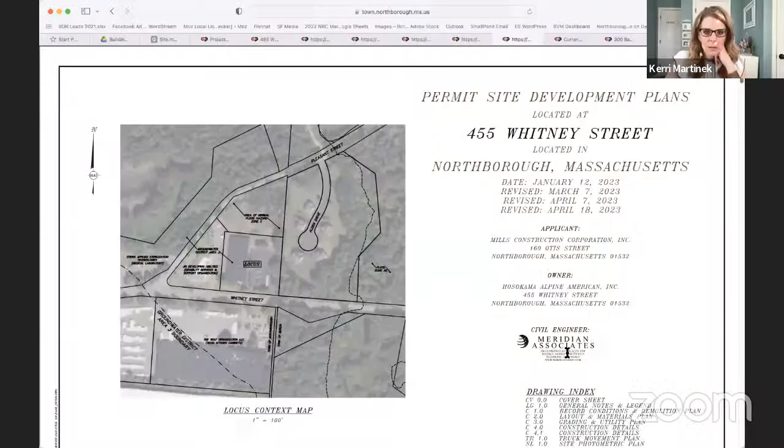Okay, do you see 455 Whitney Street here? Permit site? Yes, great. So can you go to the third sheet, which would be the existing conditions. There you go. Okay, so that shows the existing conditions, the existing limits of the pavement.

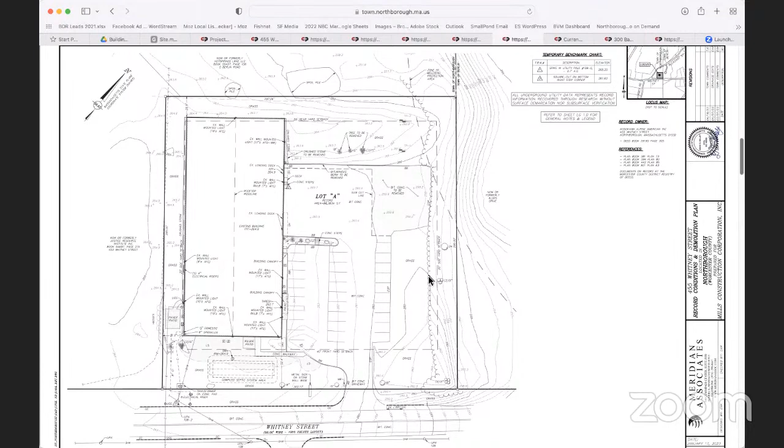The only thing to note here is where it says Lot A to the right, you'll see the proposed saw cut line in the area of pavement to be removed. If you go to the next sheet, I can show you what we're doing.

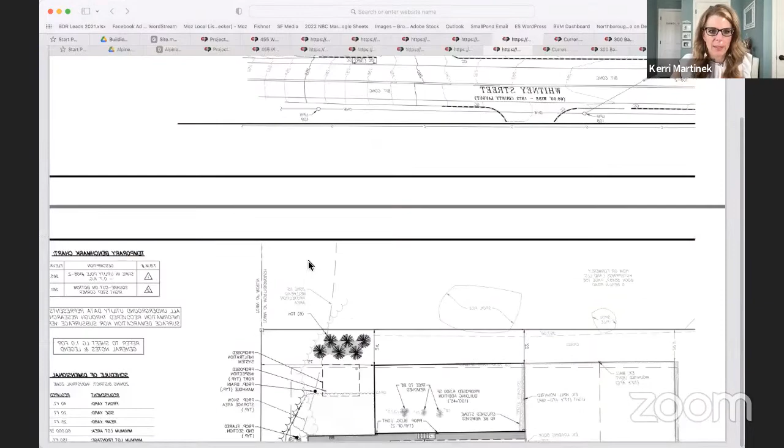Hold on, sorry, I got fancy trying to resize it and now I can't. Okay, there we go, that's good. So as you know, the applicant is proposing a 4,500 square foot building addition.

We're proposing some stormwater features, and we've worked with Mr. Litchfield on these. Next to the addition is the infiltration dry well system, which will handle the roof runoff.

Also, the area of pavement that's shaded is going to be replaced, but it's actually being scaled back a little bit. You'll see the right edge has been cleaned off and pulled back away from the property line. We've added a catch basin structure in the lower right corner with bituminous berm edging. Mr. Litchfield wanted to use this as an opportunity to improve the stormwater on site. So the area of pavement is partly being replaced because we had to tweak the grades to pitch everything into that corner.

To be collected into the catch basin unit - if you go to the next page, I can show you what's happening. As you see the proposed contours, it's going to go down into the catch basin unit, which would then dump slightly to the south into a grassed forebay, which will then cross over a weir - basically a weir with a piece of concrete curbing to create a stone weir elevation, then into a level spreader, a stone lined level spreader.

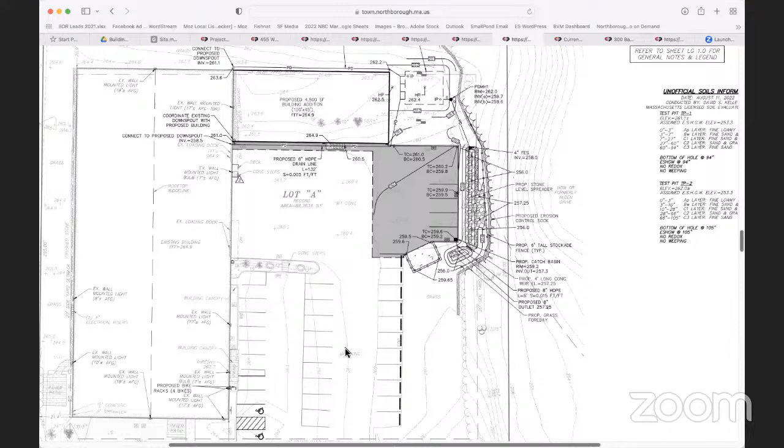If you can pan down a little bit - on the entrance there, Mr. Litchfield asked us to look at the entrance. One of the sheets in the set shows the turning movements for a WB-67 tractor trailer, which would be the largest size truck that might ever enter this place.

The existing curb layout is such that when somebody is coming from the east in the right lane, they won't be able to make that turn without turning out into the oncoming traffic in the other lane. So we've proposed a new curb line and a concrete rumble strip in that area to allow for a wider entrance. If you look at the turning movement sheet, you'll see this accommodates a truck being able to make the turning movements coming in, also going up to the back end of the parking lot to the right and back into the existing loading dock area.

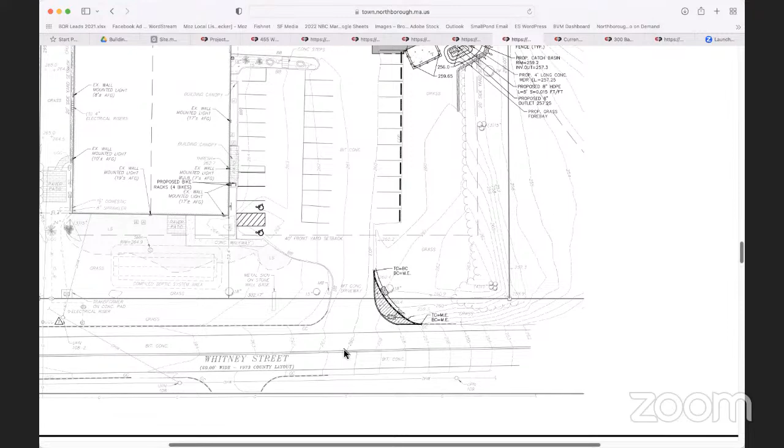So we're also replacing some trees. Those 3 trees on the right are to make up for the 3 existing trees that will have to be removed where the addition is going to go.

We're also proposing areas of snow storage, as demarcated. There's going to be a little bit of restriping near the front entrance, and we're adding 5 additional parking spaces over what's there now. This still provides enough room for a tractor trailer to go up into that right-hand corner, do their turning movement, and back into the loading dock.

If you could pan up a little bit more. So you'll see we're also adding some plantings along the north border there to help with screening from the housing development to the northeast.

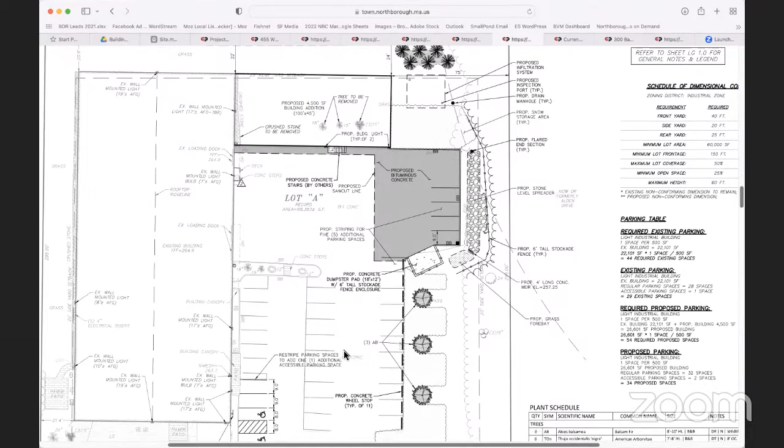I think we're also adding some miscellaneous small plantings on the front of the building along the street, off to the left there. So just some small plantings around that area. That's basically the extent.

We're also adding proposed concrete wheel stops on the right-hand side of that parking lot. Right now it's just a flat edge, and the water sheets off into the grass, which, if you look at the existing grading, eventually makes its way towards the forebay. So we put the wheel stops there to preserve that grassed area, because it basically acts as a grass strip for the runoff, which currently gets there. So we won't be increasing any of the runoff off of the site.

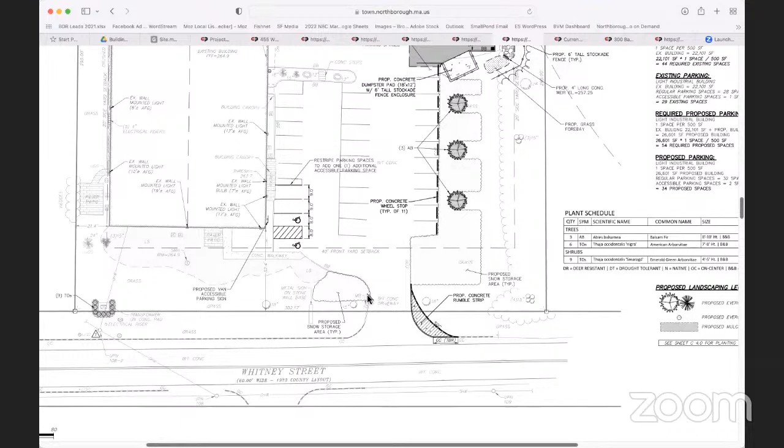And then if you want to scroll down, I think we had sent a revised lighting plan. I'm not sure if you have the latest and greatest, if you keep going.

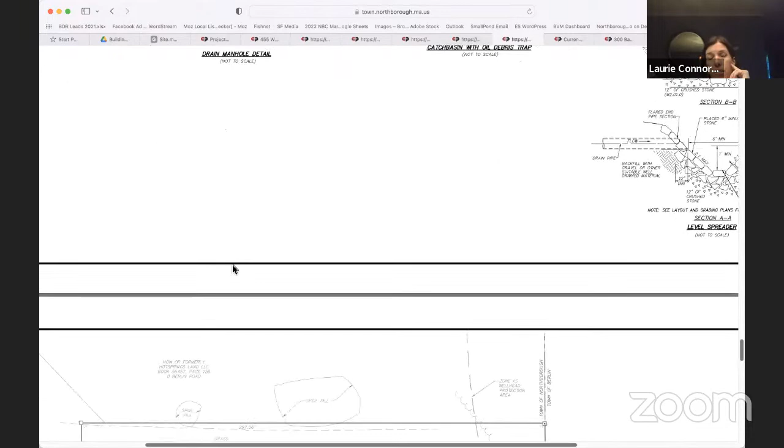Laurie, did that come separately? I feel like I saw that as a separate file. Will that be in here with this one or a separate file? Yeah, so we did receive a separate photometric plan and the cut sheets for all of the various lighting options. Okay, do you want me to switch over to that? Because I think it came separately to us. Or do you feel like it's in this doc? Well, here. Yeah, no, that's the previous iteration. Oh, okay. So hold on. I think I have it. So we had asked the applicant, Ben, was able to provide us a few photos of the existing light fixtures on the building, and we were able to track down a couple of the exact fixtures, and for the others we found equivalent fixtures as best we could to show what's out there now.

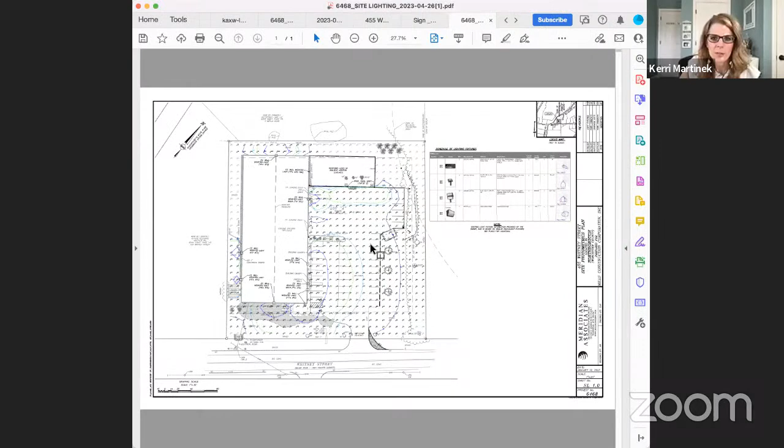The updated photometric plan is dated April 26th. Oh good, that's helpful. All right, so I think it came to us. Here we go, I have it. Okay, so does this look like the correct plan? Yes, that's the one. If you could just zoom in a little bit, that'd be great.

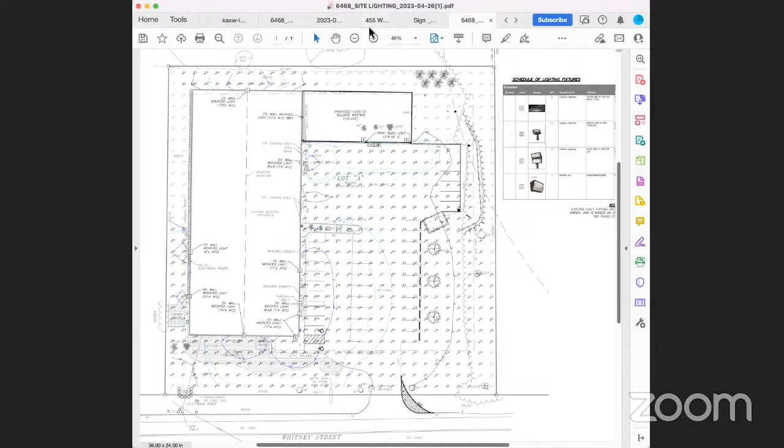So there are 4 different fixtures. Fixture A is the new one we're proposing, for the 2 locations on the addition—that's the only proposed light we have. The rest represent what's there now. For B and C, we were able to positively identify the exact fixtures. For D, we had to look at what was there and give our best approximation as to what exists for that wall pack.

And then you can see the foot candle contours on the plan. Also keep in mind the foot candle contours only represent these fixtures. Any ambient light coming off the street, or street lights out there, aren't taken into account for this particular plan.

A question came through recently about fixture B, asking if it had a shield on it. These fixtures are usually available with multiple types of shields to provide full cutoff characteristics. Based on the photo we got, the existing examples of fixture B on the building don't appear to have shields, but that fixture is still being manufactured, and you can go on Lithonia Lighting, that's the brand, and order the shields—they just screw mount onto the fixture, so that can be modified for pretty cheap money. You can also adjust the angle to ensure nothing is getting cast above the horizontal plane, which is usually what you want for cutoff fixtures.

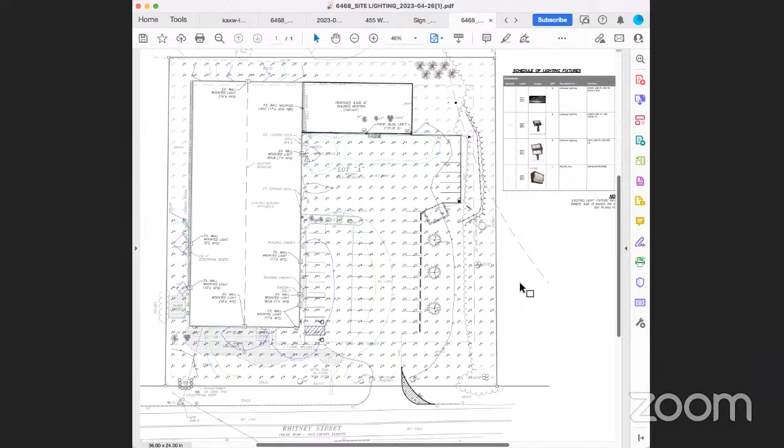Yes, to answer your question, you put a shield on it, you can tweak the angle, you can do whatever you want to make sure. If board members don't mind, if we decide to vote in favor, would you add a condition that we add the shield and adjust it so it doesn't shine?

Yeah, I had the same question for the floodlights. That was a concern of mine as well. I don't know if other board members saw that too. Right, yeah, no, I agree.

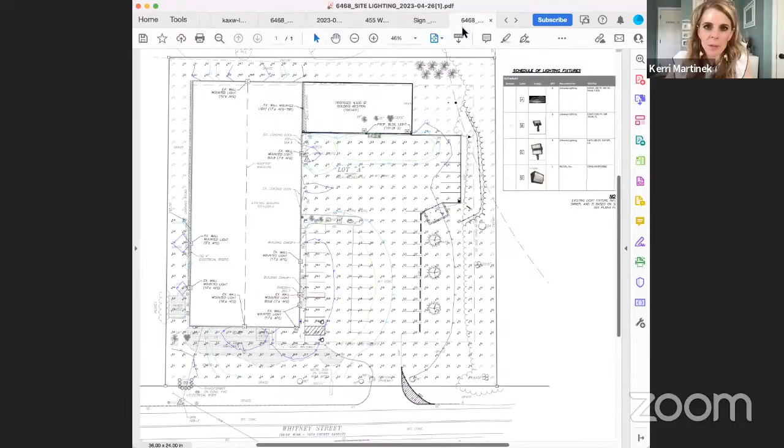Anything else here? Chris, anything else you want to point out? No, that's pretty much the gist of it. We just went back and forth with Mr. Litchfield a few times to make sure he was okay with what we were proposing for the drainage.

It's just a deep sump catch basin into a forebay into a level spreader, so it's much improved over what was there before. The outlet from the dry well goes straight into the level spreader, which you're allowed to do since, as roof runoff, it's considered quote unquote clean by the DEP stormwater standards.

That's about it. With the entrance tweaks for the rumble strip and the lighting changes, it's a little bit of striping and landscaping, and that's about it. Any questions on what was just presented before we move on to groundwater or the town planner's recommendations? And also we have a letter from the fire chief.

Oh, Amy, go ahead, I just had some questions. I don't know if this goes in with the groundwater though. I was just going to ask, Fred, do you do a check of the snow storage calculations just to make sure those two areas are large enough to collect all the snow that's needed? It seems like a pretty big parking lot.

I was just afraid of the one in the back. I don't want it to run off into the neighbor's yard, but it does look like it's right near the infiltration basin, so I'm not sure if that's what will happen if the snow pile gets too large back there.

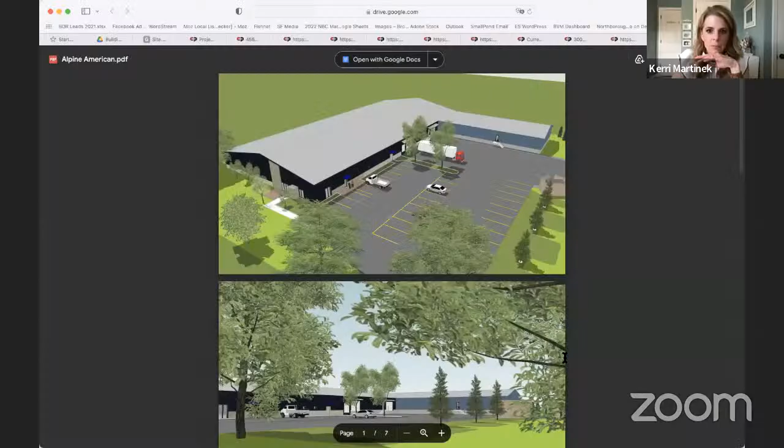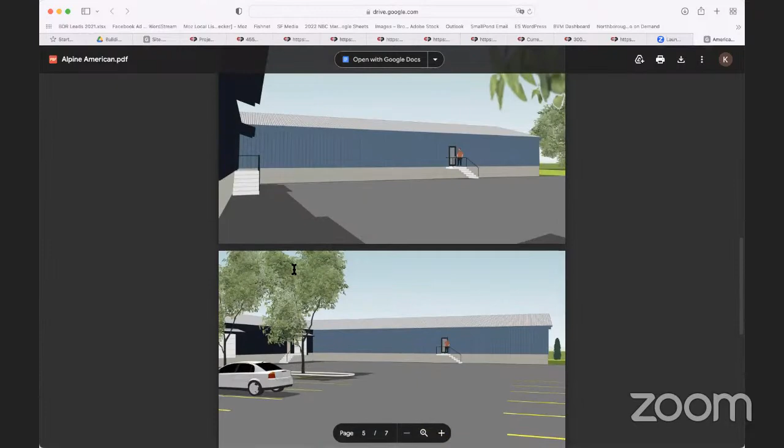Okay, can everybody see the PDF here? Yep, all right, so you can see the different colors. I'm trying to see if there's a... okay, so it's the dark, and then it has a complementary blue. It's Hawaiian blue. The first one may be the best way to see everything.

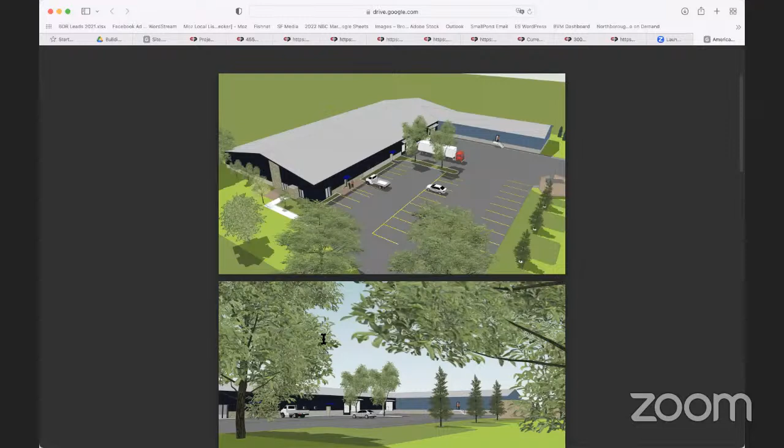So any thoughts from the board? So it sounds like basically you chose this part as the complementary lighter blue to the navy. Correct. And so Laurie, this is why you thought black, because this was navy.

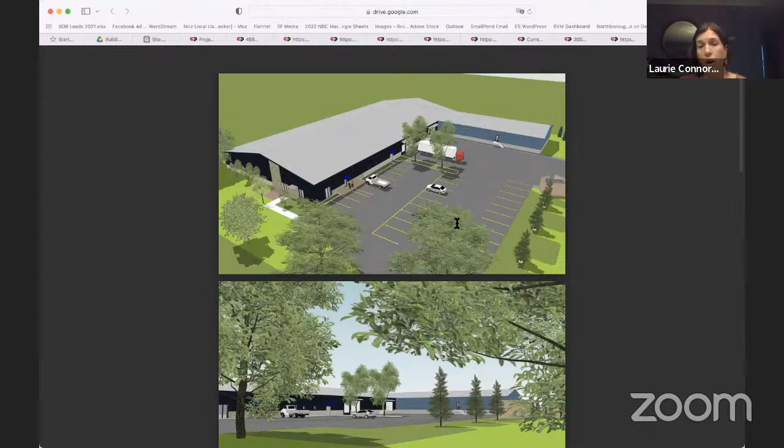I guess it's tough to tell in a picture if that's really navy. Would it look weird to be black? It looked black to me, but if it's navy, that's fine too. My thought is if they wanted to go with the lighter blue, they should paint the existing building that same color. If they want to go with the navy or black, whatever color that is, they should paint the addition that same color. That's my suggestion, just so it looks uniform, like it's all part of the same complex, not like a separate, clearly distinct addition.

Thoughts from board members on that one? I just imagine they would want this pre-painted so they don't have to maintain it going into the future, but that's my guess.

So what do you mean by that, Anthony? Like these already come painted? Well, I think that's metal, and I think it comes painted already, which would be a lot more resilient than actually painting over it.

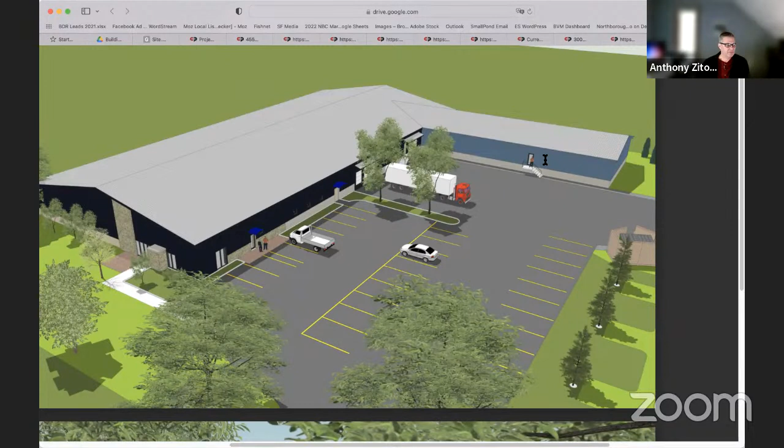Okay, so otherwise, is this also the darker portion pre-painted metal as well? So it is painted metal, yes. Okay, so to paint over it, does that become a maintenance thing all the time, or do people normally paint over metal like that? I mean, it is a painted building, and you can see where some of it needs to be repainted anyway, so it is a maintenance thing to some extent, but that's all I really know about it.

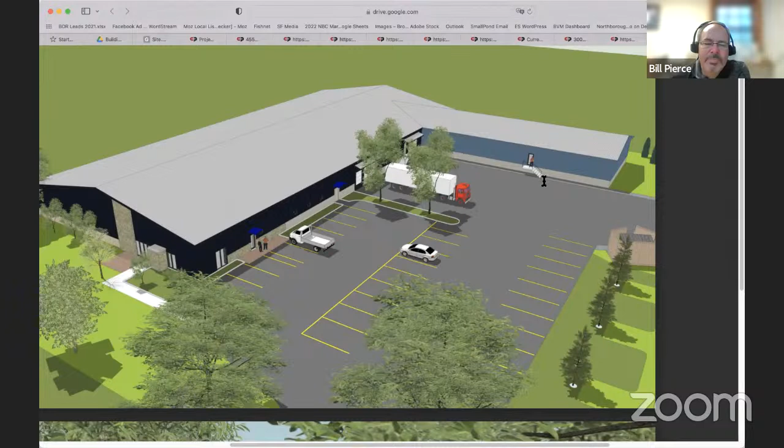Okay. Amy or Bill, thoughts from you on color? Nothing from me. Amy? Yeah, I don't know, I'm not good with color schemes.

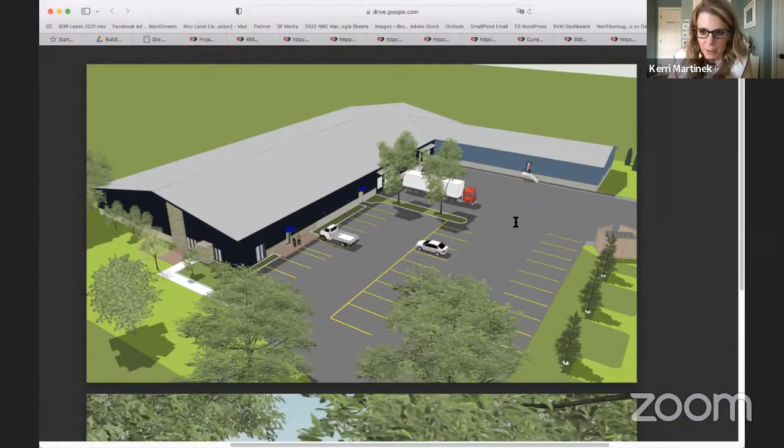I'm not super opposed, but it does look a little off to be two colors like that. What part of this faces the street anyway, because you can see it from the street? If you go back to that top view, that part over to the left where you see the little stone facade, that's the front. So this you see from the street, do you even really see this back part? You will, you can't see it normally. Oh, I see, here's the entrance, I see.

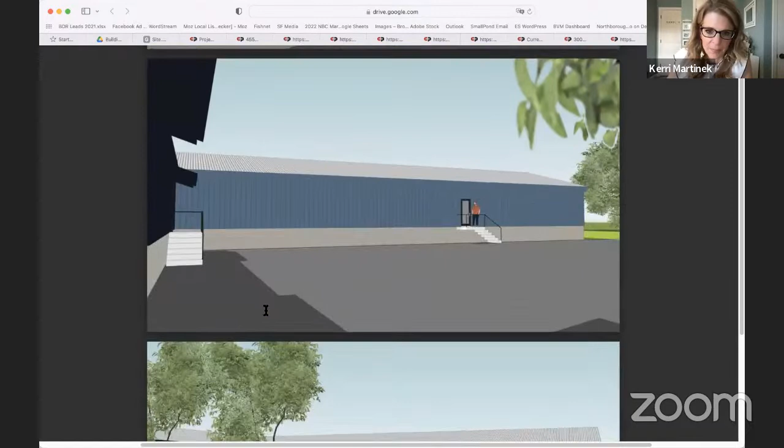I wondered if a gray would even match the black or navy more than a darker color, but I don't know, since we can't change it anyway. Yeah, we've already ordered the building, the new portion is set in that lighter blue. Oh, so you'd have to repaint the other part. Okay, yes, all right.

Laurie, you have an expression on your face that tells me you. Just a personal preference. I don't have a very good poker face, so.

Does anybody feel strongly about the color? How much work is it to match it to the new color so it's all uniform? My guess is it's going to be thousands of dollars to paint the existing structure. We haven't priced it out yet. We're trying to get a bid for that, but we haven't priced it out. It's going to be, I don't know, tens of thousands is my guess.

Did this go to design review or not? It didn't, no, it doesn't trigger. Oh, it's non-conforming, so it didn't. It's an addition to an industrial use. So it's not triggered. Got it.

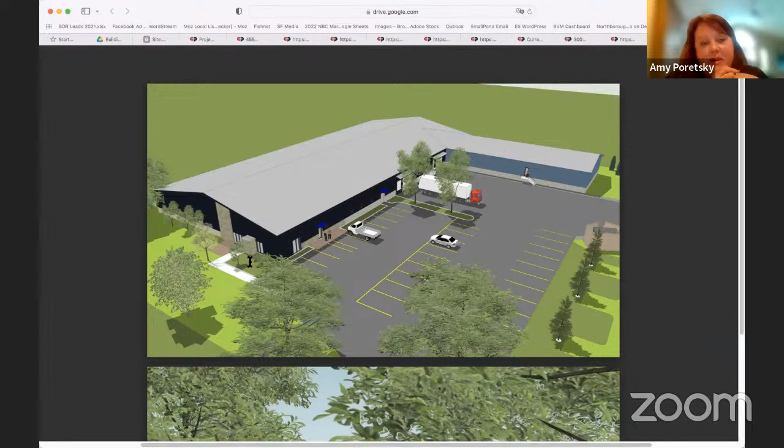Okay, well Amy, you're the design review chair, what do you suppose? I leave that design up to Lisa. I do more of the zoning code part of it, but I don't know. I think if it was downtown, I would definitely want it to match and actually probably not want it to be metal. But since it's way out in the industrial area, I don't know. It's up to the rest of the board. I don't feel strongly about it. I don't know if anyone else does.

I don't either. Bill, do you feel strongly? No, you mentioned that you're gonna paint the main building, that there's already a bid out for that. So let's see, it's the west side. The west side has some fading and a few spots of peeling. At this point, it could be touched up, but it will eventually need to be repainted. It doesn't need it, it's not urgent. It's something that we're going to do at some point.

Well, what about a condition that when it does require full repainting, that it matches the addition or goes back to a uniform color? Is that a possible condition, Laurie, so that they don't have to do that now, but the next time they do need to do that, so it's within their budget, that it be done? Sure. Does that sound like something a little better, that if you have to paint it anyway, to do the best that you can to match that exact color?

Yeah, I feel like that's reasonable. Thank you. Board members, how do you feel about something like that? I agree, I like that. Yeah, that's where I was going. Okay.

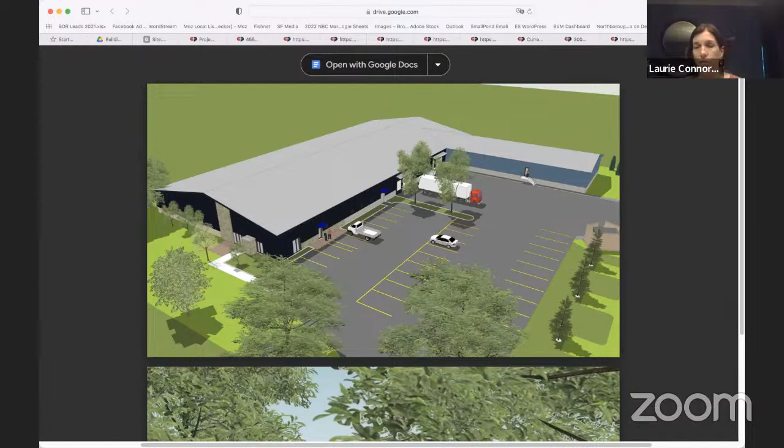Okay, and there's also a waiver on the parking lot, so that was actually to remove spaces, correct? So they're actually striping, I think it's 4 or 5 additional parking spaces. But because this is a non-conforming structure and a non-conforming use, it never had the required number of parking spaces in conformance with today's requirements. But it's clear from the fact that they have 2 tractor trailers stored on parking spaces that they have more than enough parking to serve their needs. And this addition is just going to be used for storage. It's my understanding that they're not proposing to hire any new people as part of this expansion project. So I think that they have clearly demonstrated that the parking required in our zoning today is overkill. It's not necessary for their use of the property.

Okay, any board questions on that? No, I think that's good. Yeah, that makes sense.

Okay, I'm going to stop sharing then. Are there any questions from staff at this time? No. Okay, I don't have any additional questions unless board members have additional questions. No. Nope. Okay, this is a public hearing, so at this time I will accept any comments from the public, if there are any.

Also, Amy, you mentioned a letter that went to the ZBA. I don't think the planning board received any letters from the public on this. I did not see any come through. Were there any letters from the public? I don't think so, just to the ZBA, and she just asked that I wrote down. She asked that the water doesn't flow onto our property, that the lights don't shine towards her house. I think that was... I could pull it up, but she had a couple things. Let me just look really fast. I might actually have that letter with me.

She asked to plant screening along the property line, and wanted to see some plantings to make sure the exterior lights don't shine towards her house, which I think we covered. She also hoped that drainage runoff would be controlled so rain and snow melt doesn't flow onto the properties below.

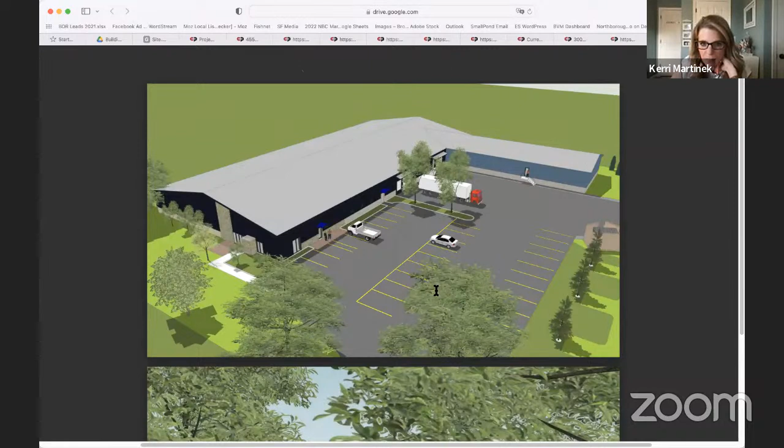Let's see. All right, so there's 2, and there's 1 toward the back. Oh, 1 toward, yeah, see there, you can see the 3 there. The 2 on the left look as 1, but you can see a divider in between them, one's larger and another's smaller. Yeah, I can see it. Okay.

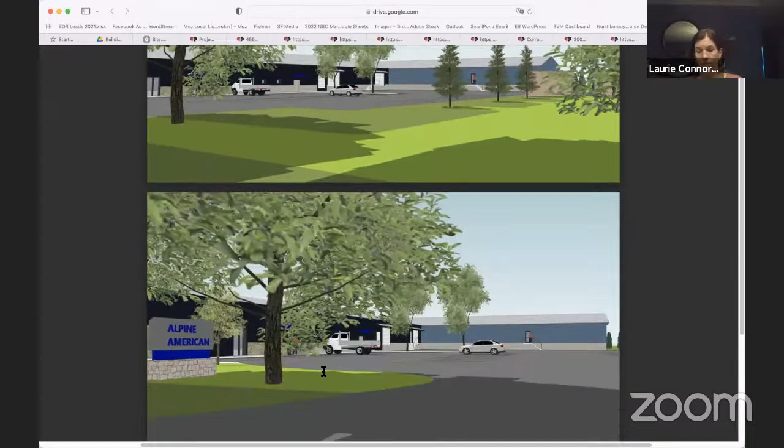I can add that, 3 loading bays. Okay, and then it looks like, I think we did this on the last one too, just provided that the conditions of approval stated below are imposed. It's just clarifying that under those conditions we find this meets. I was wondering too if that's something we can just do going forward. Sure.

Okay, any other comments from the applicant or board members? I don't have any others, thank you.

So then, is there a motion to close the hearing for 455 Whitney Street? So moved. Second? Okay, all in favor. Bill, aye. Anthony, aye. Amy, aye. Carries unanimously. So the public hearing has been closed.

At this point, why don't we talk about, before we vote, the criteria? We are voting on the groundwater protection special permit and also site plan approval. So why don't we start with the groundwater special permit?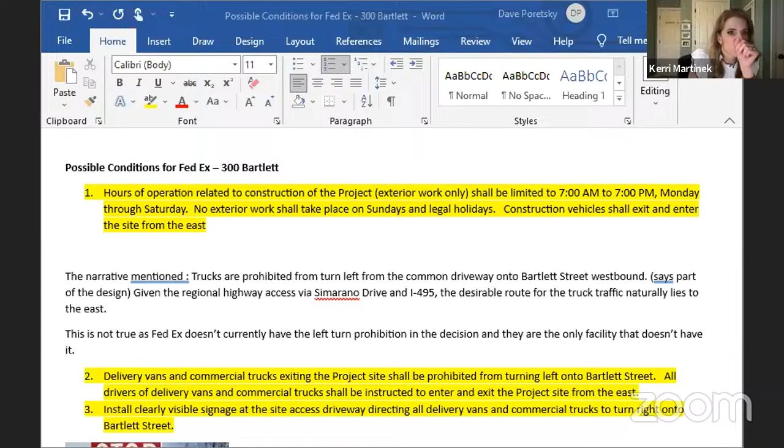Showing my screen. I don't know if you can see it. Yep. So I can pull them up if you guys want. Sure. Oh, I actually did this exterior work only one, but we said we might do that going forward anyway.

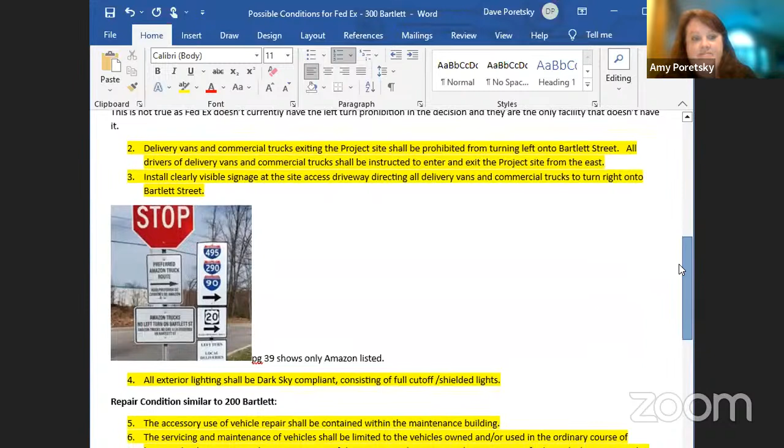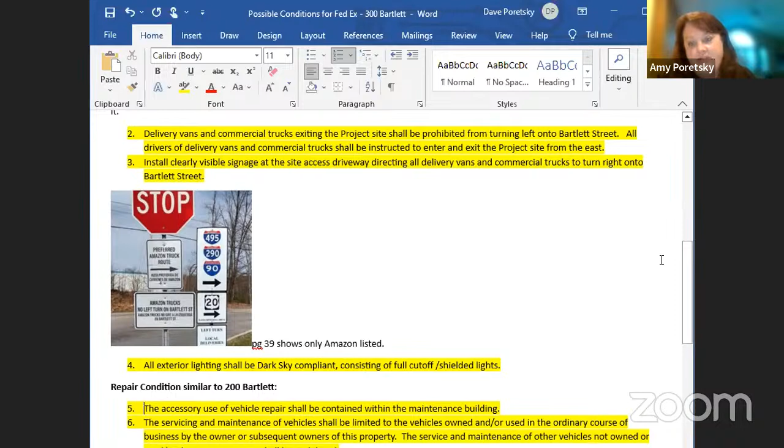Yes, I agree. This is the current sign, so I don't know if they're going to have to make up new signs, because it just says Amazon. So it'll have to probably say Amazon and FedEx. I'm sure they could probably both work it out to say all, and just have one sign. And then 200.

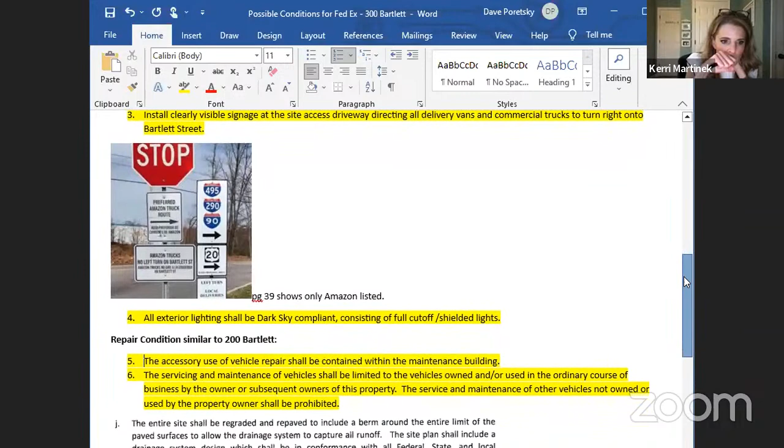How does the board feel about the maintenance building? I do think it's good to point it out. And as Peter mentioned, it does sound like they intend to only use it for their own vehicles anyway.

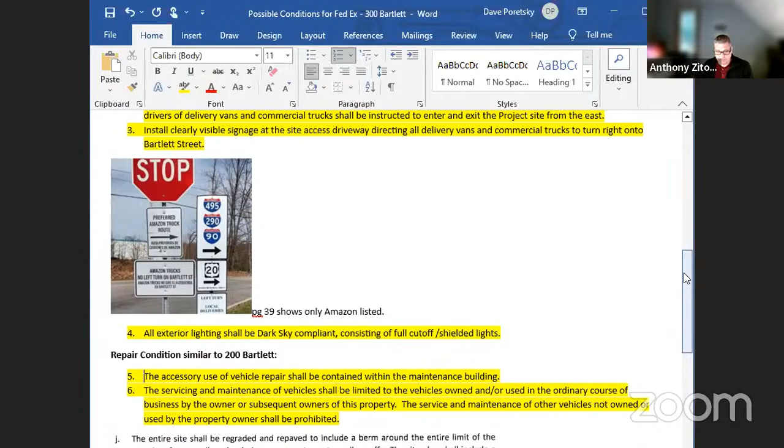Yeah, it can't hurt to put it in there. Agree? Okay, was that it, Amy, from your end? Yep. Any other thoughts from the board? Not for me. No.

Okay, so Laurie, in terms of drafting a memo—and Peter, thank you so much for coming in and answering these questions—I don't know if any of these stand out to you. I think we talked through all of them. No, these conditions all seem pretty fair to me.

One question though on number 4, because the lighting we're talking about—these are existing poles and fixtures. I don't know if what was built 12 years ago is dark sky compliant right now. Is the board looking for FedEx to completely replace the fixture, or is it asking FedEx to add shielding to the existing light poles?

I would say add shielding. Maybe Laurie, you could word it like you did for the last decision, which was adding shielding. Yep. I think that's perfectly reasonable, and I really don't see any pushback on that.

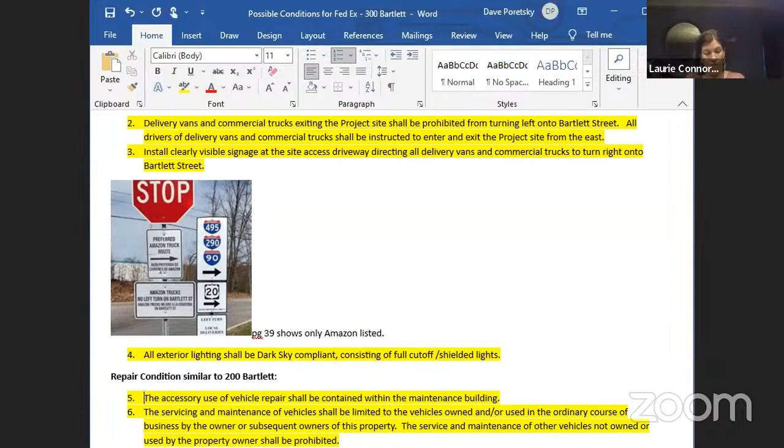So Laurie, if Amy shared this with you, is that a memo that you don't mind drafting, or do you want me to draft it? No, I'll draft it. Okay, all right, well then, if there's no other conversation, anything else from the board?